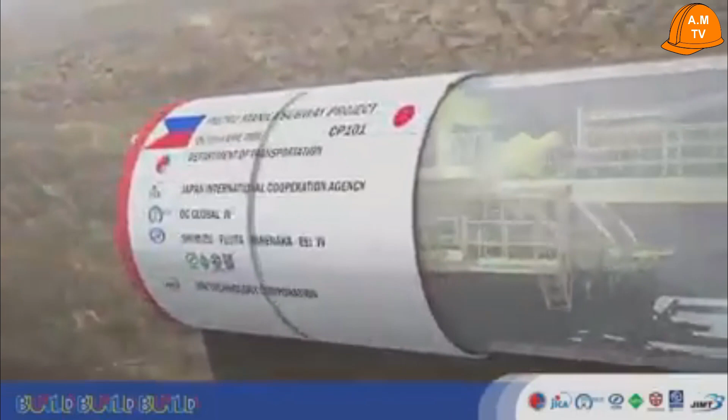One of the most popular construction methods used by tunnel boring machines, or TBMs, is EPB.

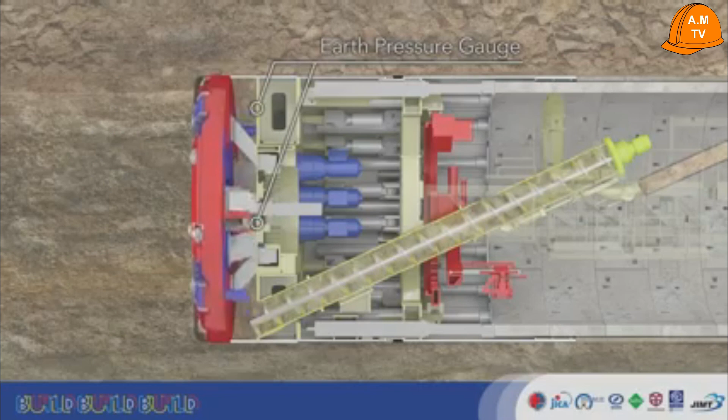Underground TBMs are constantly subject to static earth pressure and water pressure. To even out and balance them, thrust jack cylinders apply forward pressure. The earth pressure balance is managed with an earth pressure gauge.

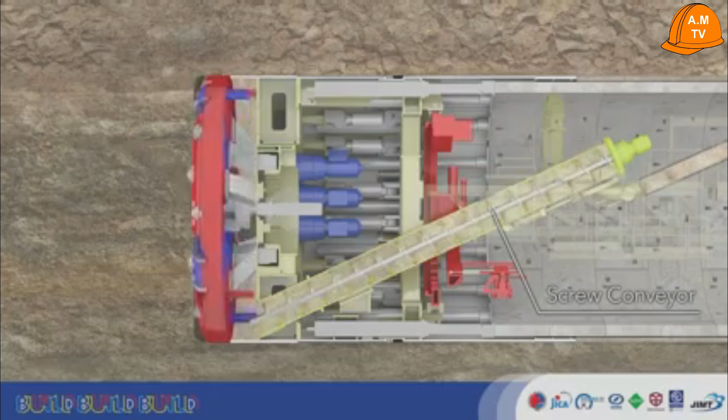The ground is excavated by the cutter head and broken up. Additive is injected to soften and adjust it so that it can more easily convey pressure to the earth pressure gauge. Pressure balance is maintained while excavating, and soil is evacuated using the screw conveyor.

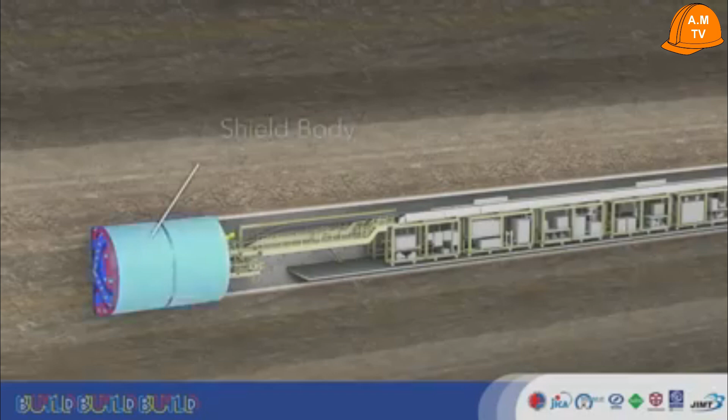TBMs, such as EPB machines, are composed of a shield body, which performs tunnel excavation, and a backup system, which carries the equipment necessary for this excavation.

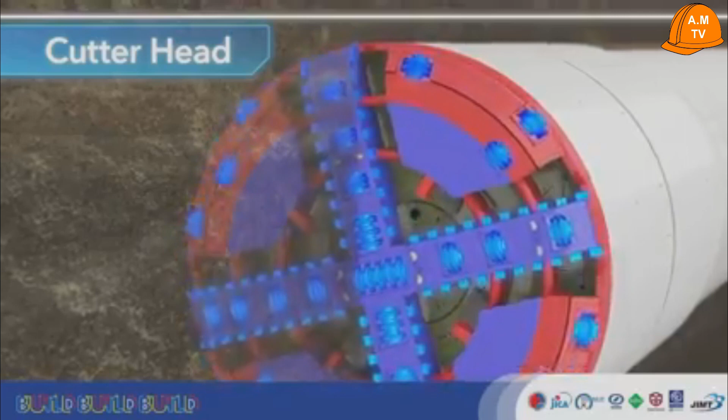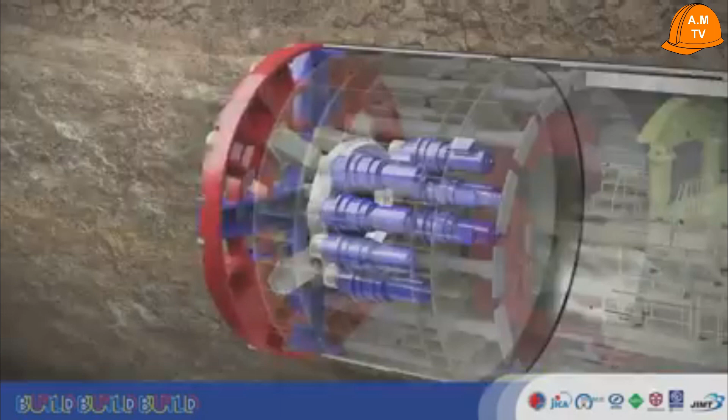The cutter head rotates, excavating the soil in front of the TBM. The cutter head is equipped with disc cutters and scraper bits, which can be replaced when they become worn down. The bearing is rotated by the cutter motors, turning the cutter head at the front of the TBM.

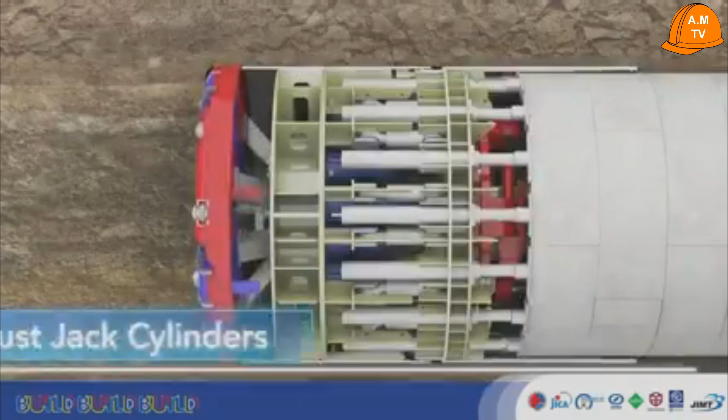Thrust jack cylinders are extended to push assembled segments, and the counterforce pushes the TBM forward.

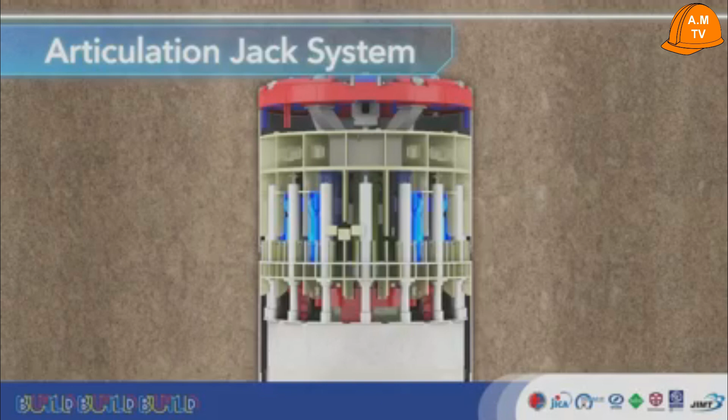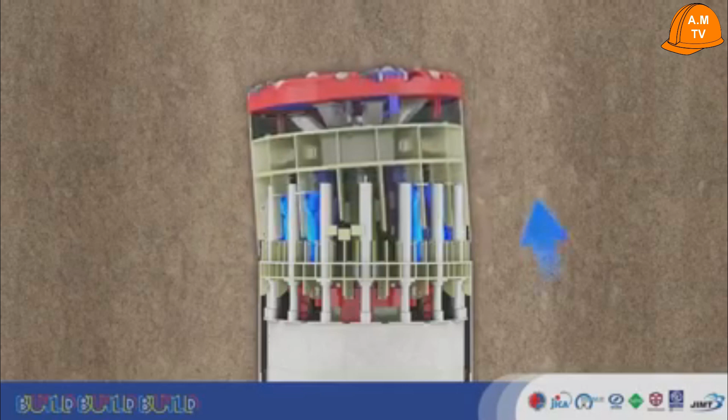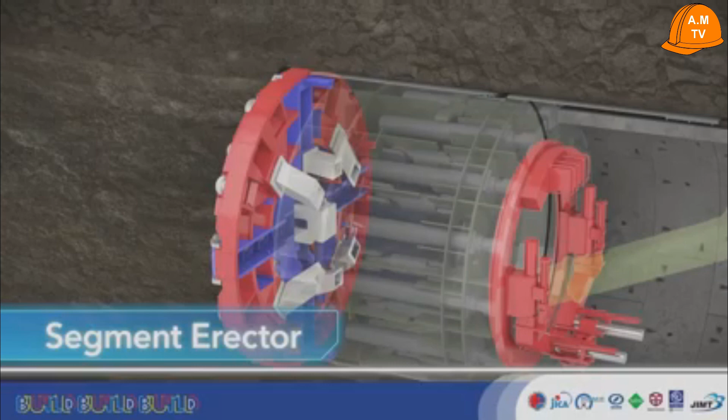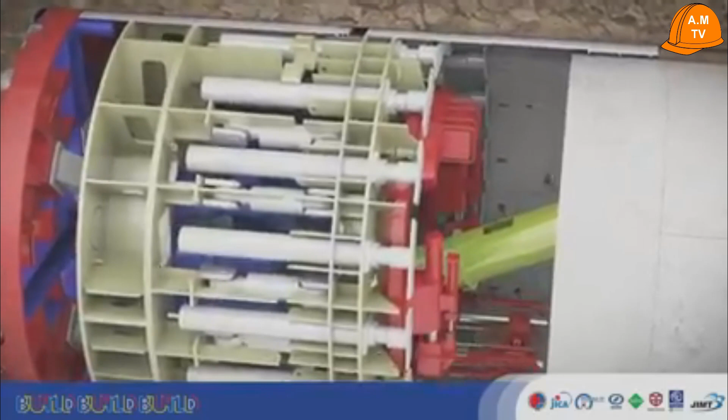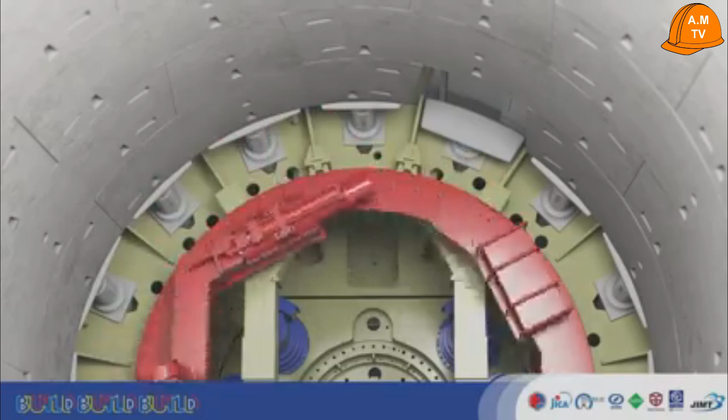The erector holds a segment for each stroke of excavation, assembling these segments in rings. The erector places each segment in place individually, and then places the key segment, completing the ring. The TBM uses a symmetric staggered joint construction.

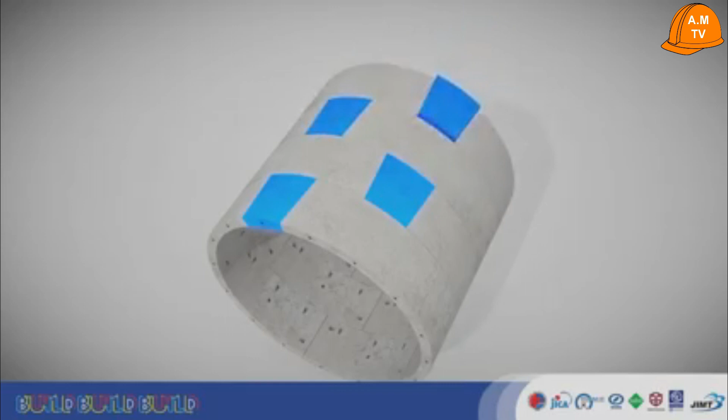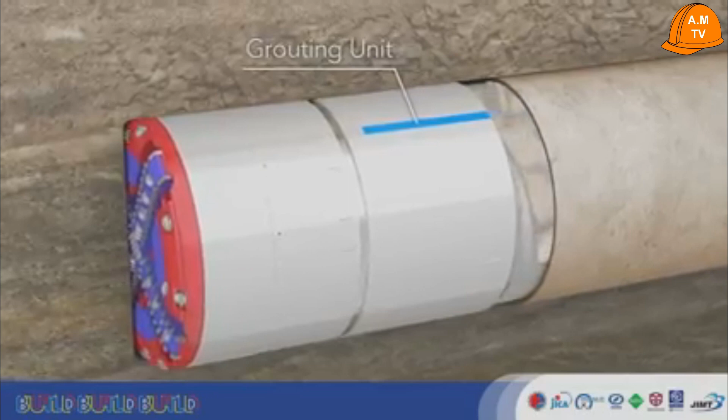The embedded pumps in the backup cars pump A liquid and B liquid to the grouting units mounted in the machine. Two grouting units pour grout between the segments and the skin plates while the TBM performs excavation. This prevents subsidence and water leakage between segments, as well as rapidly stabilizing segments.

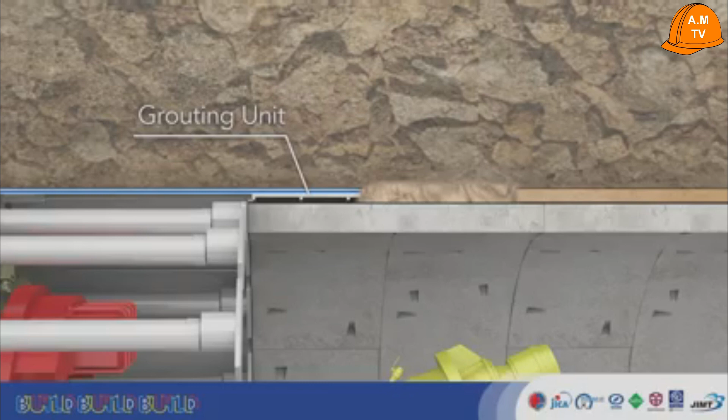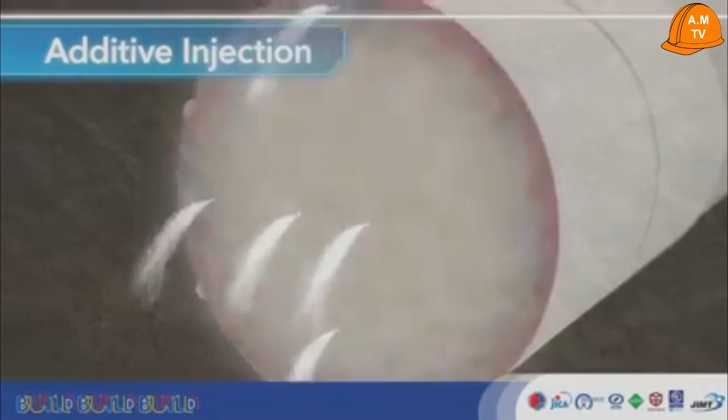The additive pump in the backup cars pumps foam and polymer to the cutter head. Additive is injected by the cutter head while machine excavation is in progress, fluidizing the mud.

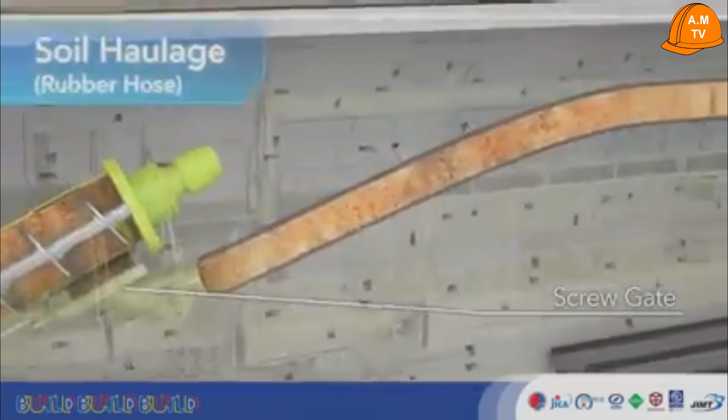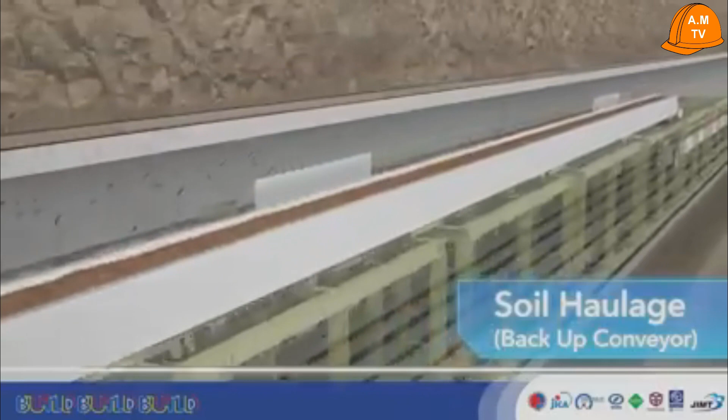The screw conveyor carries excavated soil to the rear of the TBM. The soil is passed through a rubber hose to a backup conveyor and tunnel conveyor in that order, and carried to the rear of the tunnel. The use of tunnel conveyors is far more efficient than evacuation by muck cars.

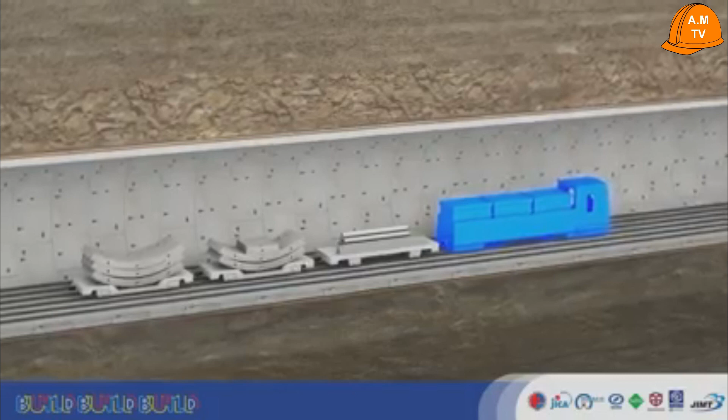The rolling stock supplies new segments. It is made up of a locomotive, two segment cars, and a platform. A crane picks up individual segments brought in from the backup and loads them one by one to the erector.

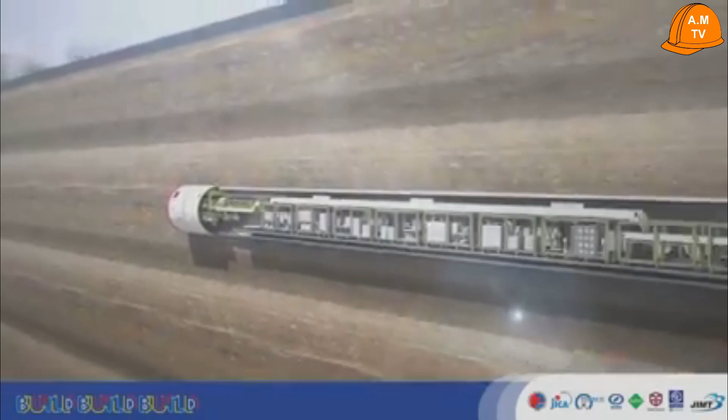EPB machines improve excavation efficiency and contribute to urban development.